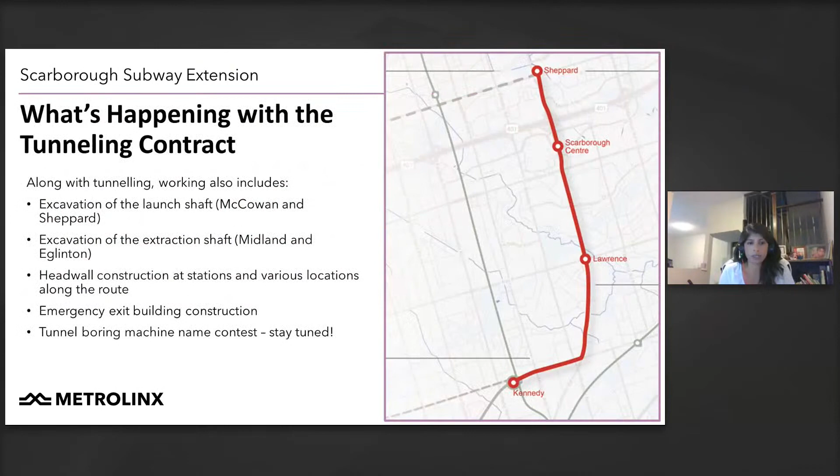We're going to start off with the land acknowledgement. Metrolinx acknowledges that it operates on the traditional territory of Indigenous people, including the Anishinaabe, the Haudenosaunee, and the Wendat peoples. In particular, these lands are covered by 20 treaties, and we have a responsibility to recognize and value the rights of Indigenous nations and peoples and to conduct business in a manner built on the foundations of trust, respect, and collaboration. Metrolinx is committed to building meaningful relationships with Indigenous peoples and to working towards meaningful reconciliation with the original caretakers of this land.

I'm going to move into a safety moment. Safety is a cornerstone at Metrolinx, and a key commitment to the communities we operate and build in. As excavation works begin at the launch shaft site at Sheppard and McCowan, we're encouraging residents to be aware of the increased truck activity that's going to be occurring.

There's going to be a lot of activity. We can expect to see a truck every 5 to 7 minutes or so, and it will increase as activity on the site increases, so please do look both ways when crossing the driveway. There are driveways along both Sheppard and McCowan. If you see something, please say something and contact our team - our number is posted. Please stick to the designated viewing areas to see what's happening, and there are some slides further down showing the things we've added to the site for the public.

I'm just going to turn it over to Ross, who's going to segue into the construction aspect of this project.

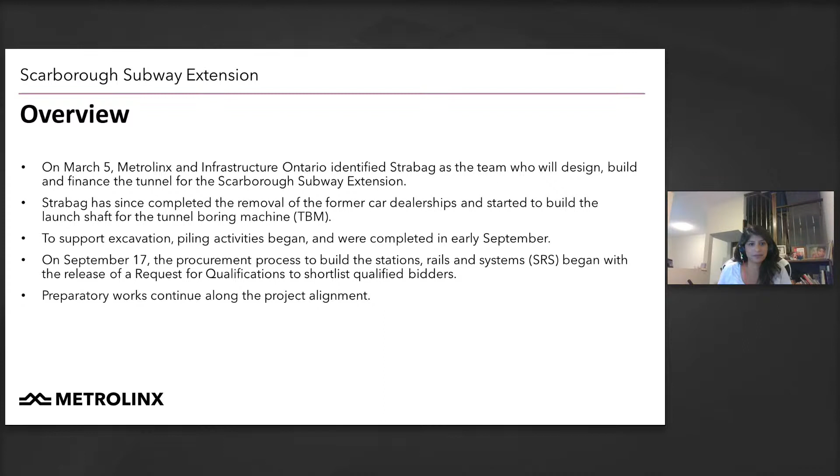I'm with our construction team, and I'm going to give a brief overview of where we're sitting today with the project, where we've come over the last number of months since we talked to you last May. And then, what I'm hoping you're here for tonight, we're going to introduce Thomas from our tunnel constructor and talk about who they are and how they're going to deliver this project for us, but more importantly for you.

As some of you will know, but maybe not all, the journey with Strabag began officially on March 5th, and that is when Metrolinx and Infrastructure Ontario identified Strabag as the team to design, build, and finance the tunnel for the Scarborough subway extension. This is the first major contract as part of this project. The next one is actually a few bullets down, I'll explain, but this is a large contract, and they basically hit the ground running as soon as they were identified.

For those who drive past the Sheppard and McCowan intersection, you'll notice it has changed a lot over the last number of months. We've installed our wooden hoarding around the job site, both for safety and security reasons. And behind that, we've done a lot of work. The first things we did was to demo the existing Ford and Nissan car dealerships, and then move on with what has been the main focus over the last number of months, which Thomas will talk about - the construction of the launch shaft, which is where the tunnel will start.

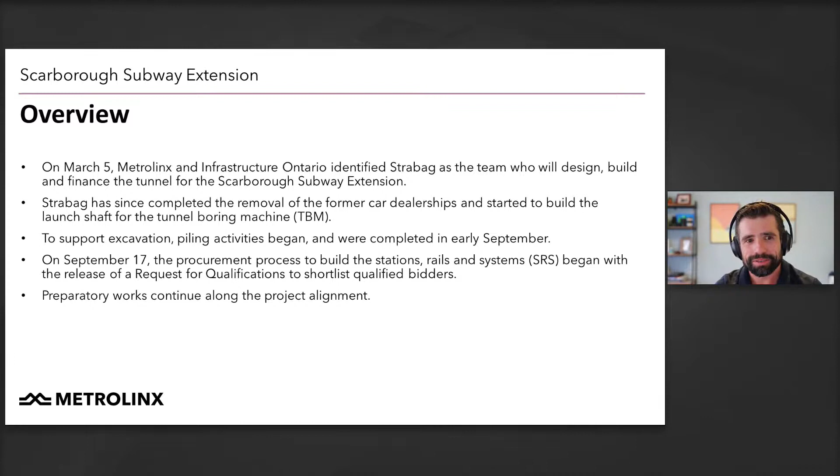Our focus tonight, and again we're introducing Strabag, our tunneling constructor, is to talk about what's happening with the tunnel contract. As I'm sure everybody here knows, we are building a 3-stop extension of Line 2, starting at Kennedy Station in the east, continuing along Eglinton, turning up Danforth and heading north on McCowan, terminating at Sheppard and McCowan, with stops at Lawrence, Scarborough Centre, and Sheppard.

So along with the tunneling work, what has to happen? There are some major features that need to go in. One is the installation of a launch shaft, which Thomas is going to talk about. That work's been happening at McCowan and Sheppard for the past number of months. The second major work will be the extraction shaft, at Midland and Eglinton. That's where the TBM, once it has finished its drive, will be lifted out of the ground.

There will be a number of head walls, which basically form the two ends of the future stations. They will be built along the way. There's 5 of those that need to be built. And then there's 14 other head walls that need to be built as part of the emergency exit buildings, which are evenly spaced along the line to, as they suggest, provide an escape route in case of emergency.

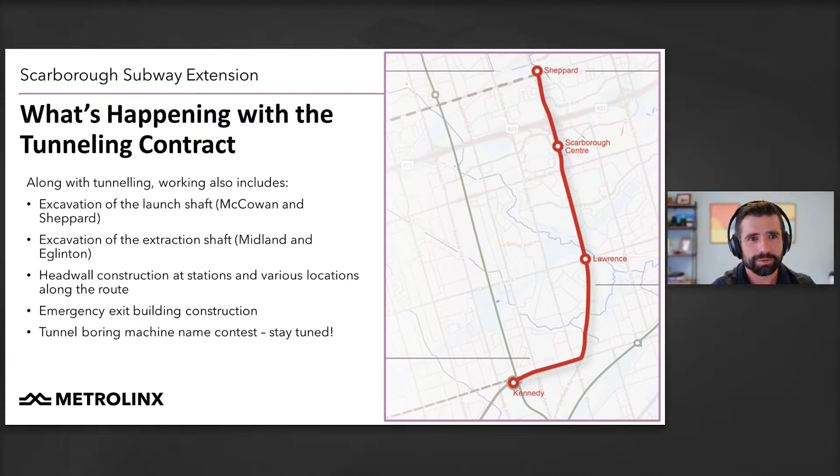Thank you very much, Ross, and I think we can go to the next slide. My name is Thomas Tuzinski. I'm the construction coordinator for Strabag for the Scarborough subway extension, and I would like to give a short introduction into our company. Strabag is an Austrian-based company and a global leader in tunneling technologies. We built transportation infrastructure in more than 60 countries and currently have around 75,000 people employed, working in over 80 countries all over the world.

We're bringing together people, material, and machinery at the right place, at the right time, to deliver complex projects on schedule, in the highest quality, and at the best price. For this project, Strabag's scope of work is basically to build the launching shaft, then the extraction shaft. Additional to this, 5 head walls for the future stations alongside the alignment, and 14 head walls for the future emergency exit buildings that we will have alongside the alignment. Next slide, please.

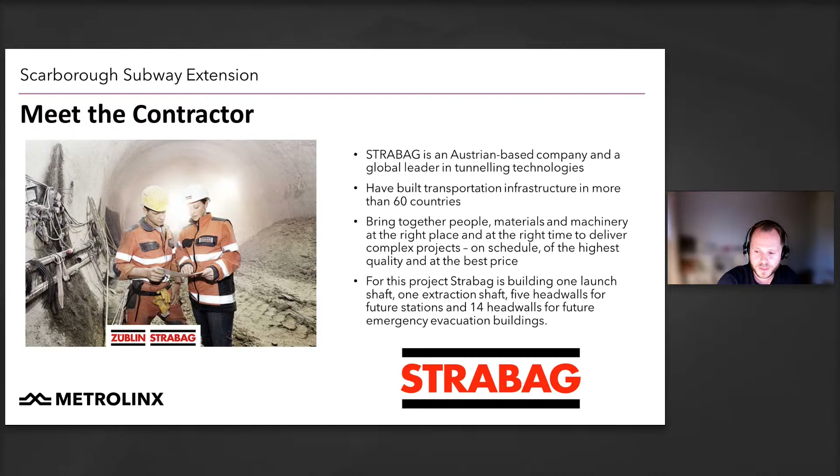So as Strabag, at the moment we started the excavation works at the launching shaft 1 location. In the previous months we have been completing the piling works, and now started, since roughly 1 to 2 weeks, excavation works, and at the moment we're pre-stressing our tiebacks at the location. So as you see, preparation for the launching shaft has been completed almost, and we're now starting with the excavation to prepare our launching shaft for the arrival of the TBM, as well as the assembly of the TBM at the launching shaft location.

For the tunnel boring machine itself, at the moment, during this week, we have the factory acceptance test going on in Schwanau, Germany, where our producer Herrenknecht is basically showing us our TBM machine, which then will be disassembled and made ready for transport to get it shipped to Toronto, Canada, which should arrive at the end of December, beginning of January.

Starting through the middle of the year, we will build the TBM on the LS1 location and lower down the TBM to start the tunneling operations along our alignment.

For the station headwalls, we will start in April, May with construction of the headwalls alongside the alignment. We'll see these in certain places, most of them at the beginning close to the launching shaft area and then following down the alignment toward Kennedy.

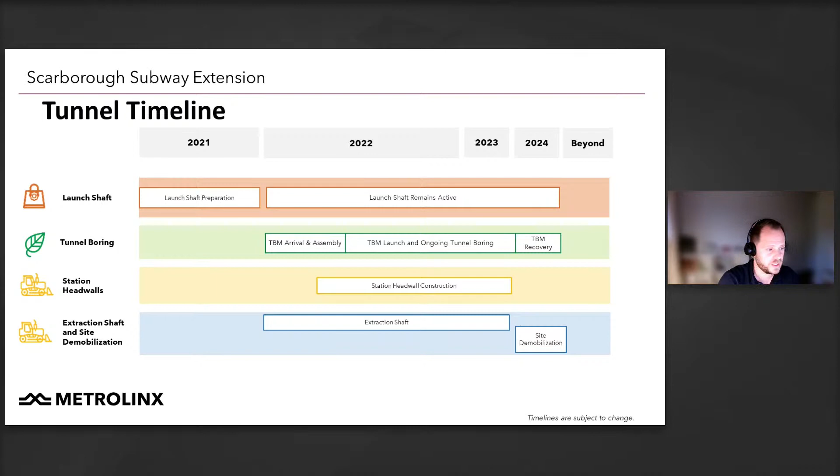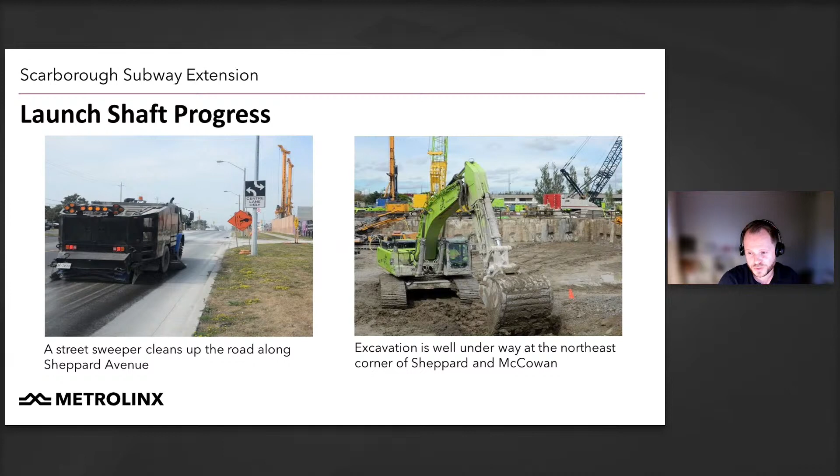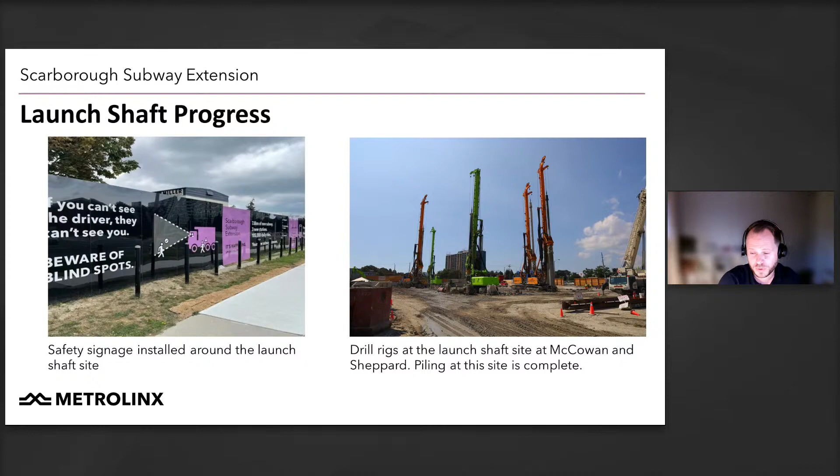I think this slide is dedicated to Ross, and I'd like to hand it over to him. Thank you very much—well, dedicated to Ross is a bit of a push, but no, thanks, Thomas.

I just want to reiterate how excited we are to have Strabag on board with us. They're an Austrian-based company, but have been in Canada for many years, and we like to remind people of that because this is not their first venture here. We feel very confident with the partner we've selected.

Just some quick highlights—the project that brought Strabag to Canada was the Niagara Tunnel expansion. It was a tunnel that brought water from above the Niagara River down to the Sir Adam Beck generating station. Fascinating project, I saw that earlier in my career, but that's another story.

As Thomas mentioned, as we speak, some of our colleagues are in Germany inspecting the machine for its final checks before it's taken apart, then loaded up and shipped by boat to Canada. So its assembly has been going on for a number of months, and we're now at the final stages. Very exciting.

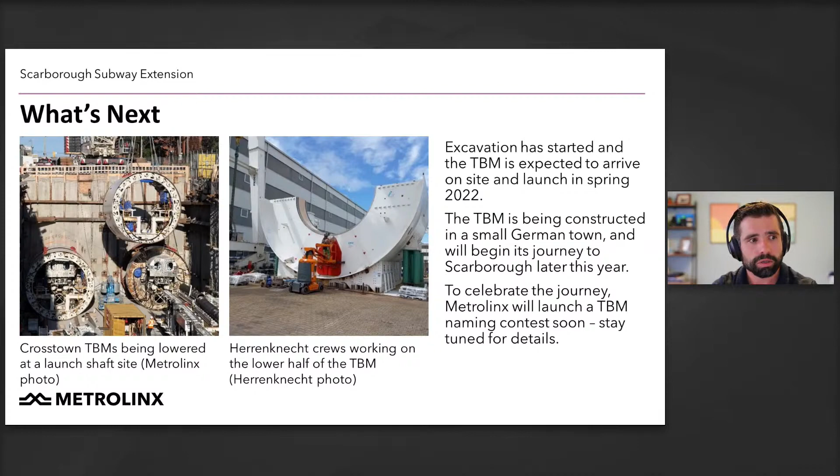So Daniel, we'll go to the next slide, and this is actually our last slide. We should have a contact slide at the end, which is just a reminder to everybody here, and I know Joseph and others will help remind people that we are here.

If you have questions, please send them to us, whether it's in a forum like this tonight, or any other time, whether by email, through our portal online, or by phone. Our 416-202-7900 number is prominently displayed at the construction sites, and it will be the same number for this project. If you have a question or concern, or if you see something that doesn't look correct, a safety or environmental concern, don't hesitate to call. If it's an emergency, call 911 first, but do let us know and we will take action. There is a human who will answer the phone day or night. We do have a service overnight that will field calls as well, so we are here and happy to help.

Joseph, back to you, hopefully I didn't talk for too long there. Not at all, thank you Ross. That was interesting, it's great to actually see the thing being built.